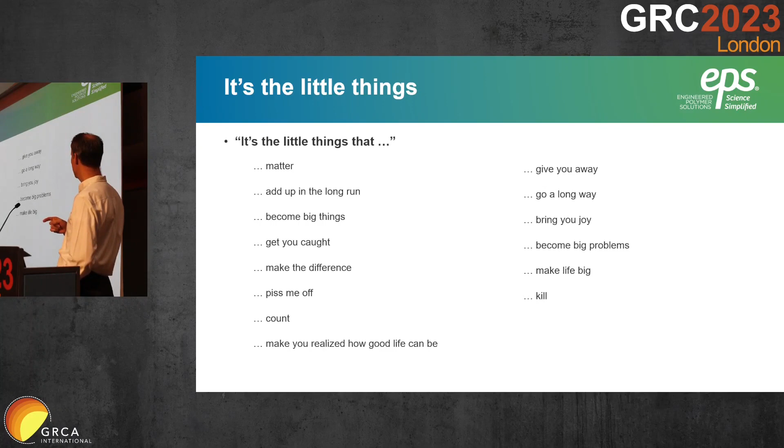The little things sometimes piss me off. Little things count. Little things make you realize how good life can be. They give you away. They go a long way. They bring you joy. They become big problems. They make life big. They kill. They make a big splash.

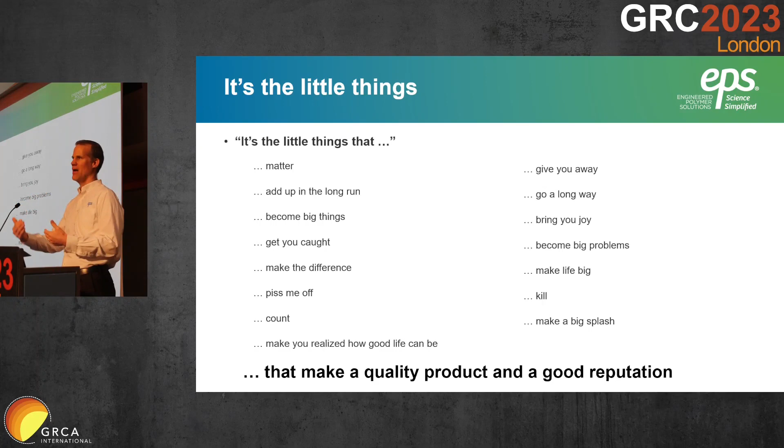And today I want to talk about the little things that make a quality product and a good reputation. As Bob said yesterday, talking about quality, it's the little things that add up into a really big 160-page PCI quality manual, right? It's a bunch of little things that go into production that make sure you have consistent quality product every time.

Chemistry is all about the little things. The building blocks, like molecules or crystal structures that go together and they build kind of like Legos. You kind of snap them together to make structures, and from those structures come properties. So the structure of cement, depending on how that microstructure goes together, how much water's in there, how much cement, how much sand, how much polymer, it all adds up to give you a structure which gives you properties. And as a chemist, I love studying that structure-property relationship.

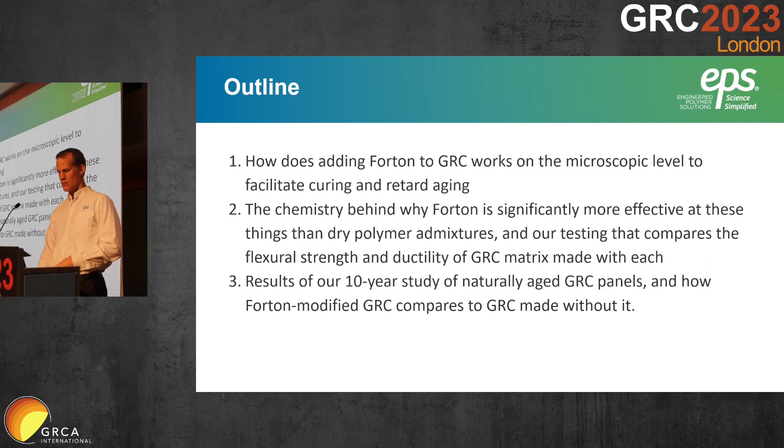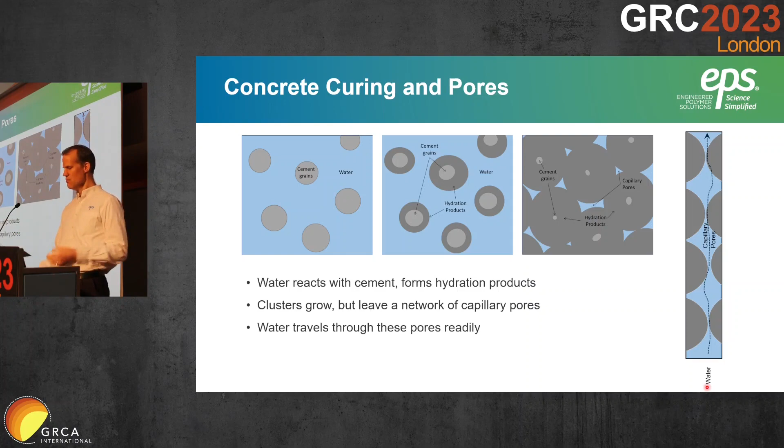The larger these pores are and the more connected they are, the easier it is for water to move through the system. So when you demold GRC, it's typically after about a day. At that point, cement, as you know, isn't completely hydrated yet. Those pores are still fairly large, and it's very easy for water to move through these networks and evaporate. To keep that water in there, there's the requirement for a 7-day wet cure to make sure that there's constantly water around for cement to hydrate with.

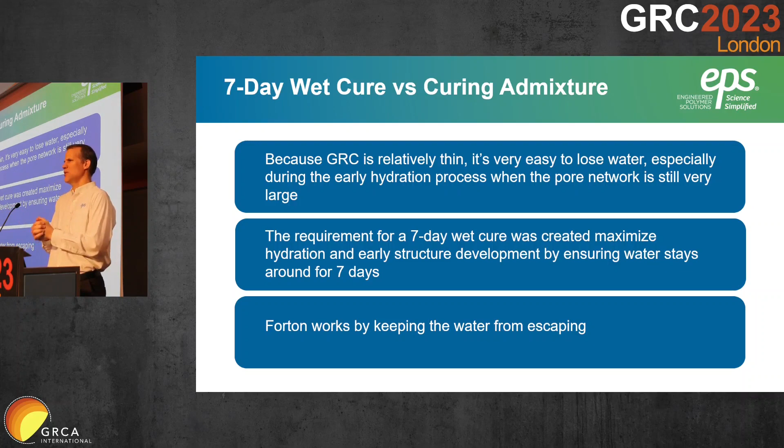Shortly after alkali-resistant glass fiber came to be a thing, Forton was also added into the mix, and it was shown that by adding 5% of it by weight of cement, you could eliminate the need for the 7-day wet cure. How does that happen? It's a somewhat complicated process, and honestly, we don't understand it perfectly. But in general, it works by keeping the water from escaping the system. I will come back to this. I put them out of order.

In addition to that, you've got particles inside the matrix that get trapped and lodged in these capillary pores, in the smaller places, as water comes and evaporates out. Again, the water can get out, the polymer can't, and it gets stuck in there because of the MFFT, minimum film formation temperature, which basically means above that temperature these particles can coalesce and form a film. Because of that property, they'll come together, form a film, and make essentially a plug that retards the movement of the water.

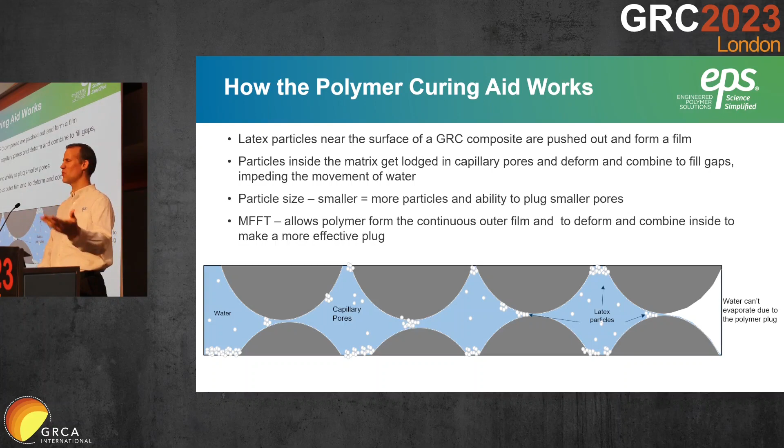So water outside of there can evaporate, but it keeps most of the water inside, allowing it to hydrate. It doesn't do a perfect job because there's a lot of pores in concrete. But adding 5% lowers the diffusion and the ability for the water to leave enough to keep the water in there well enough to give it the full wet cure. Now, see if I can go back. Yes.

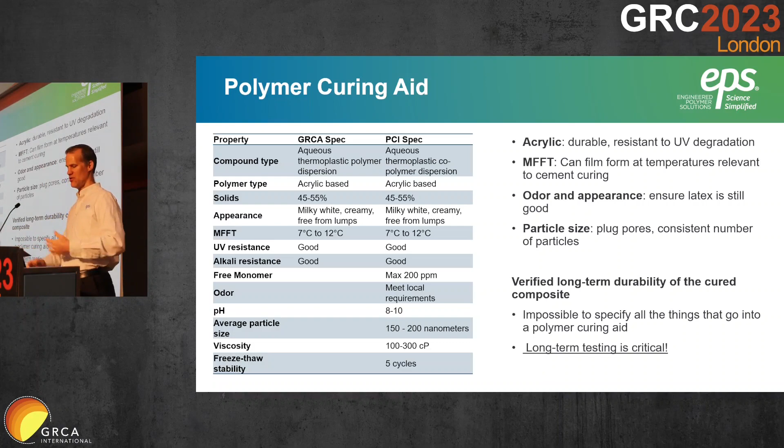Again, with quality, you can make a product good enough to get your check. But ideally, you make it good enough to get your check, and it's going to last, and you're going to get repeat customers. You're going to get a quality reputation from the stuff that you've got out there. So that long-term testing is important as well.

Okay, so we've been asked a number of times, why not dry polymer? Why does it have to be a latex? I've answered that question to a lot of people, so I thought it would be a good thing to talk about. There's three things that I pull out to say why a latex instead of a dry polymer. Particle size is one. Oftentimes with a dry polymer, the initial primary particle size is upwards of 400 nanometers. It's just a lot easier to produce a dry polymer that way with a larger particle size.

Agglomeration: when you make these things, you make a latex, you spray it into the air, the water evaporates, and these things agglomerate into larger particles. Those are never 100% redispersible. Some of them get really close and disperse very well. Others don't disperse very well at all. But you never get 100% redispersion. So you start off with this many actual particles, and if they're in agglomerates, you've just got a large chunk, a ball of polymer instead of individual pieces.

And then the other one is 100% solids never equals 100% polymer. In the materials that we've checked, I've seen anywhere from about 50% polymer to about 90% polymer. The remainder of that is flow agents and surfactants; you need those to make sure that they can redisperse. And then there's fillers that are added in there to help with the flowing and whatnot in the system. So know what you're getting.

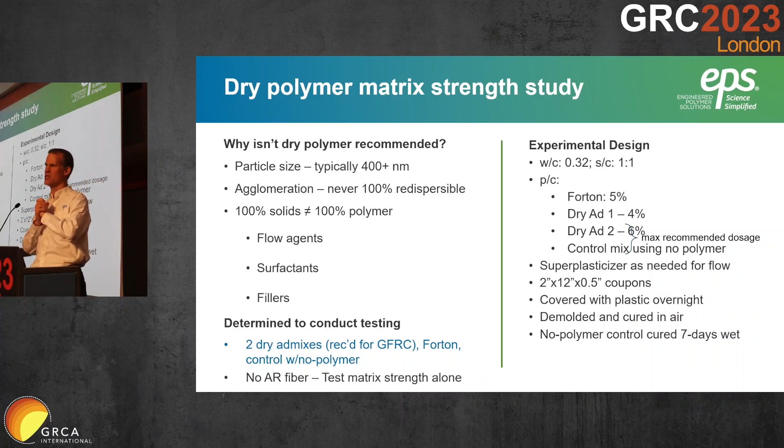Cast coupons 2 inches by 12 inches by ½ inch, covered with plastic overnight, demolded in the morning, and cured in air the rest of the time, except the no polymer control was cured with a 7-day wet cure. At the end of the 7 days, we tested the flexural strength using the third-point bend test.

You can see the results there. We've got the flexural strength, generally correlating to the LOP of the materials, on the left. On the right here, you've got the displacement or the flexural strain at break. You can see the control down there, the dry polymers on the right, Forton on the left.

In general, the dry polymers did have some effect. They did increase both the flexibility and the mortar strength compared to the control, with all the other parameters the same. But the Forton was much more effective: 130% improvement in strength, 200% improvement in flexibility compared to the control, whereas the dry polymers are about 70% and 100% improvement in flexibility. So there's definitely a difference.

Again, Forton's been used since basically the beginning, close to the beginning of GFRC. If you're going to use a different polymer, test it, so you know what you've got.

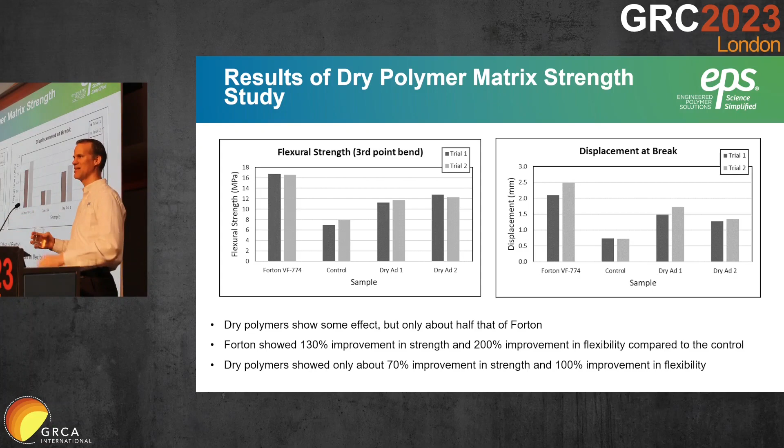Just a commentary on particle size. I said the smaller the particle size is, the more individual particles you have, the more and smaller holes you can plug, etc. Just to conceptualize that, if you take a cube of material, give it a characteristic length, call it D, as 1, and the number of particles there is 1. If you cut that in half in all 3 axes, D equals a half, the number of particles becomes 8. If you do the same thing again, it becomes 64. In general, the number of particles is proportional to 1 over the diameter cubed.

So if you want to compare the primary particle size of 2 different resins, you can essentially divide the diameters cubed, and that's the difference between the 2 of them. So if you have a 400 nanometer particle and a 150 nanometer particle, you've got 19 times more particles with the 150 nanometer particle. So the difference in particle size isn't that big, but the difference in number of particles and how well they're dispersed throughout is significantly different.

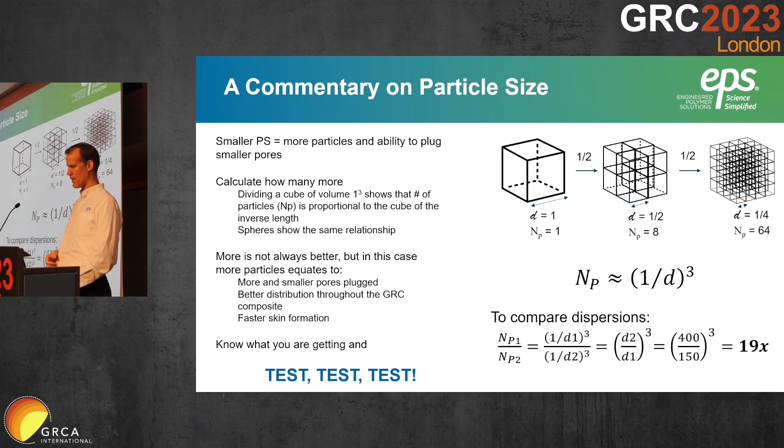More is not always better, but in this case, more particles equates to more and smaller pores plugged, better distribution, and a smaller particle will give a faster, more effective cure, film formation in this system. So in the end, know what you're getting, test.

Switching topics. How am I doing on time? I have no idea. 2 minutes left? That's not right. Okay.

You all know how GRC ages. It embrittles. Calcium hydroxide will dissolve in water, and then as the water evaporates, it's going to deposit again; it dissolves, it moves, and it builds crystals. Those crystals oftentimes get into the empty space in the fiber bundles, and they clog up the fiber bundles, so the GFRC goes from a very ductile material to a very brittle material.

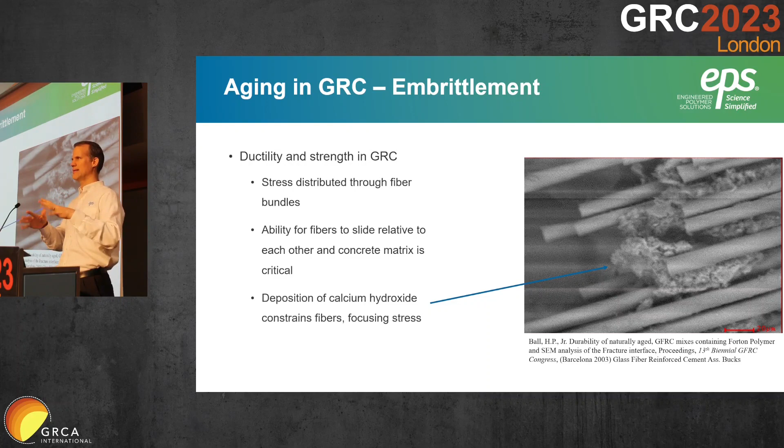How do polymers work in there? While the cement is curing, you've got water that's evaporating. There's a lot of space that those small latex particles can get into. When the water evaporates, the polymer particles can't, and they will build up in these fiber bundles. The bundles are essentially giant superhighways for water, and anything smaller can travel through there very quickly, but the polymer will get in there and it will bind in there.

Again, what that does is control the movement of water. The slower the water goes in and out of the system and around, the less the calcium hydroxide is going to dissolve and build up in other spaces.

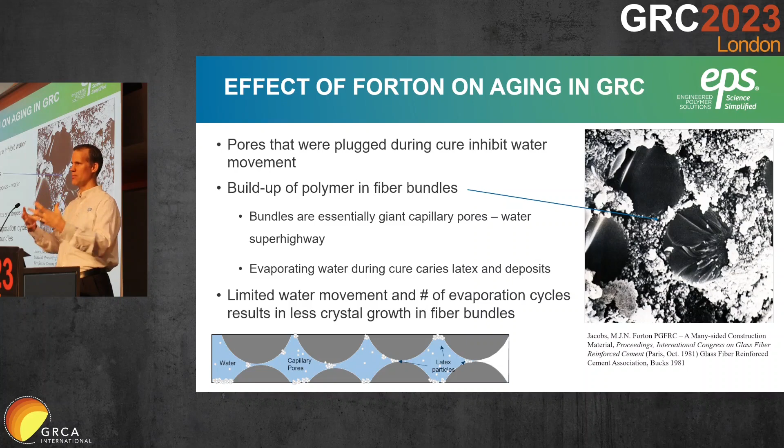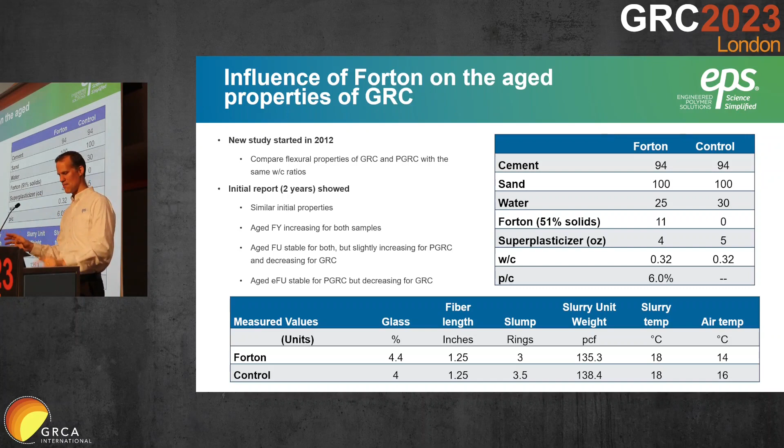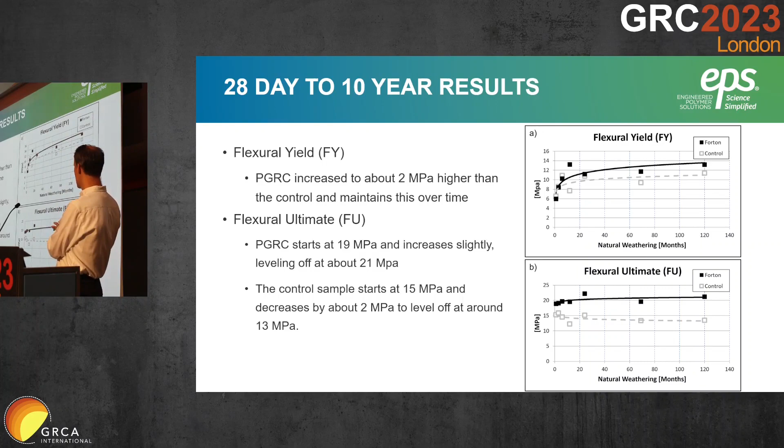To look at this, 10 years ago we started a project looking at GRC made with the same water to cement ratios, using Forton and using no Forton. 2 years ago we showed the results up to 24 months. We've got 10 years results in here now. You can see the Flexural Yield grows for both of them, with Forton a little bit more than without. The Flexural Ultimate, with Forton it's actually going up, whereas without Forton it's going down.

And you can see basically with Forton it maintains a lot of its original ductility. After 10 years, you've got 85% of the ductility remaining when you're using the 6% Forton, and only about 33% of the initial value when you don't use Forton.

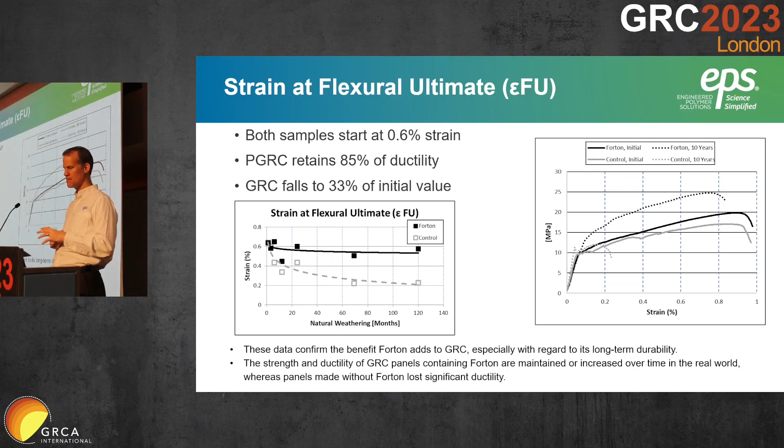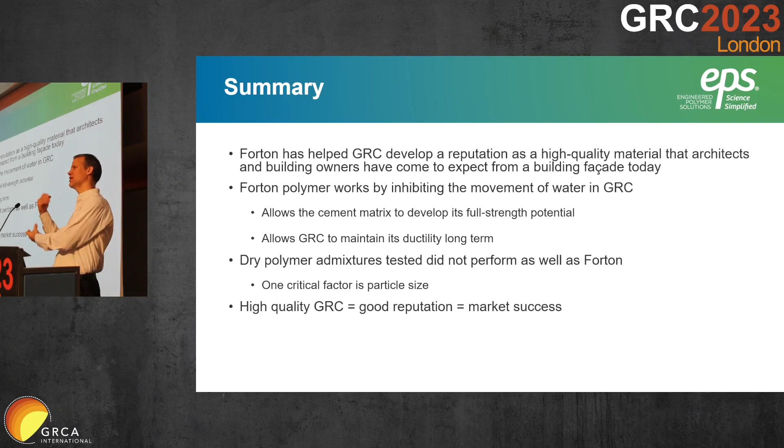Here's my conclusions. But the one I really want to hit on is high quality GRC leads to good materials, good reputation, and market success overall.